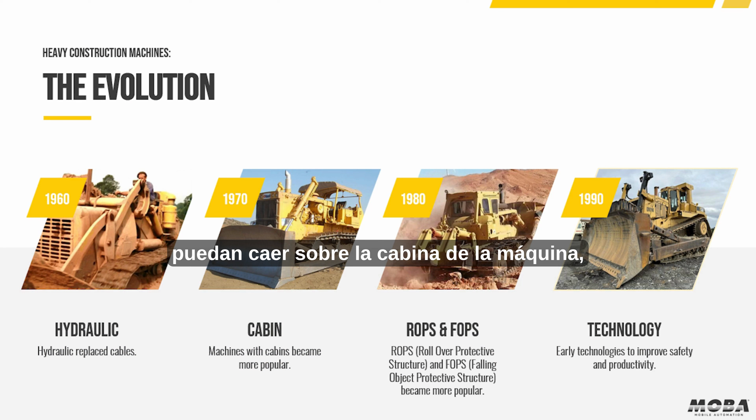In 1980, we start seeing some devices to protect the operator, ROPs and FOPs. ROPs is a rolling-over protection, so if the machine rolls over, the cabin will not be destroyed. The FOPs is protection from falling objects over the cabin, in order to protect the life of the operator.

In the 90s, we see some initial technologies to improve productivity and safety. Then in 2000, we start seeing machine control systems all over the world, to improve quality, productivity, and also safety — nobody was needed in the surroundings of the machine.

In 2010, we start seeing autonomous projects — a lot of technology removing the operator from the cabin. And then in 2020, we start seeing the junction, the mix between autonomous and remote operation. You'll understand the difference between those two technologies in a while.

So what is the backdrop of all this evolution? What is behind it? Initially, it was safety and health — more safety. Nobody was really, in the beginning, worried about the dust the operator was breathing and the conditions, the vibration he was exposed to; it was mostly about safety. But occupational health was also one main concern over the years, because a lot of workers in the mining industry started getting sick and having diseases from the work.

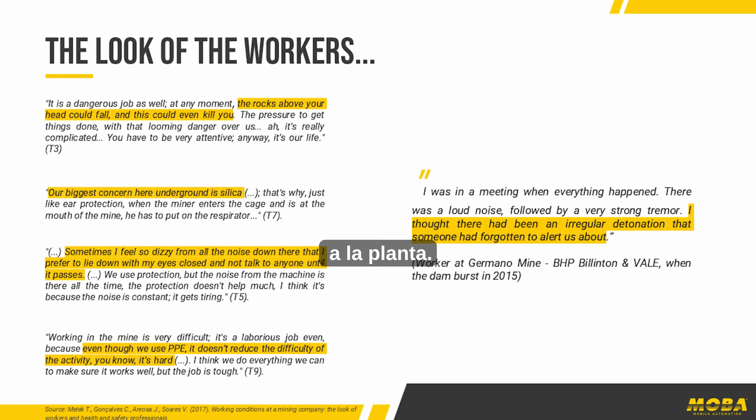So how do they feel? In yellow are the most important ones. The rocks above your head could fall, and this could even kill you.

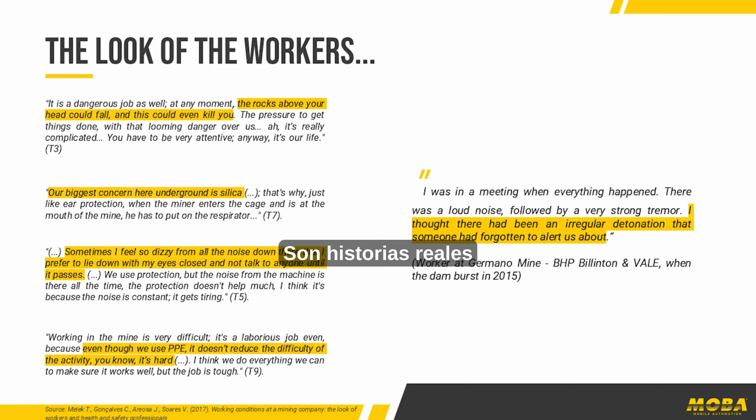These are real stories from a research study. So here is the source if you want to take a look.

Our biggest concern here underground is silica. Silica causes cancer, lung cancer.

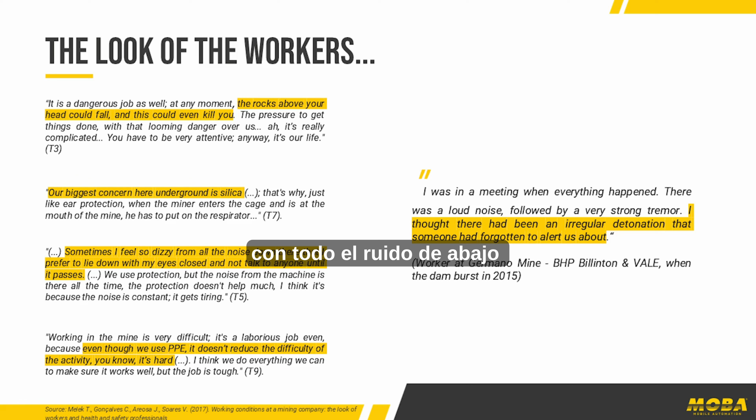Sometimes I feel so dizzy from all the noise down there that I prefer to lie down with my eyes closed and not talk to anyone until it passes. Even though we use PPE, the protection equipment, it doesn't reduce the difficulty of the activity.

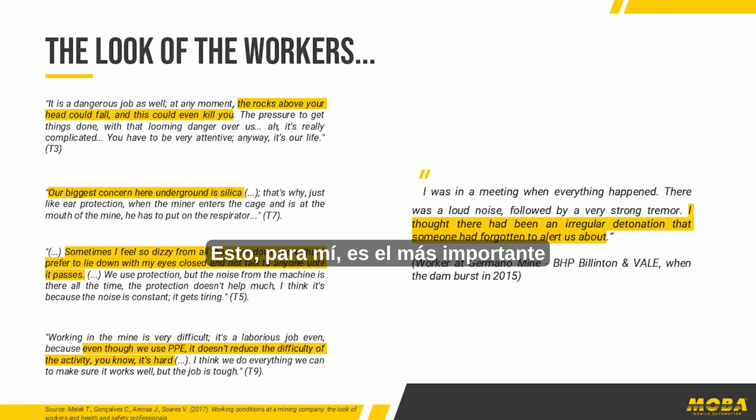You know, it's hard. This is from real operators in the mining industry. And this one, for me, is the most important because it's from my own husband.

I thought there had been an irregular detonation, that someone had forgotten to alert us. He was in the mine when the dam collapsed.

So again, maybe, or definitely, we should use more and more technology to take people out from riskier areas.

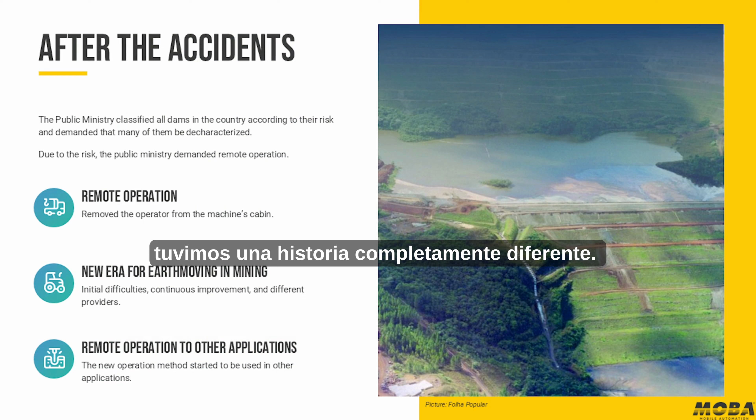So after the accidents, we had a completely different story. The public ministry classified all dams in the country according to their risk and demanded that many of them were decharacterized - that's the term. So they had to remove all the material inside the dam and give it another destination.

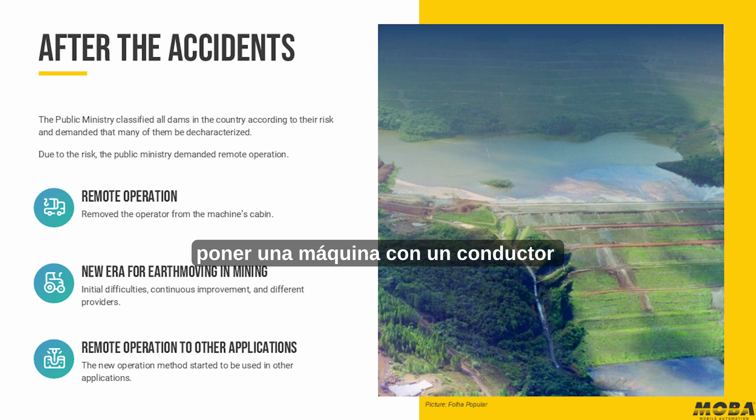So we started seeing more and more remote operation, because the public ministry said: okay, you cannot put a machine with a driver inside in this riskier area. We are talking about safety. So remote operation became mandatory.

So there was a new era for earth moving in mining in Brazil. Of course, it was a challenging time for all the companies, and they had to adapt. They had, of course, initial difficulties.

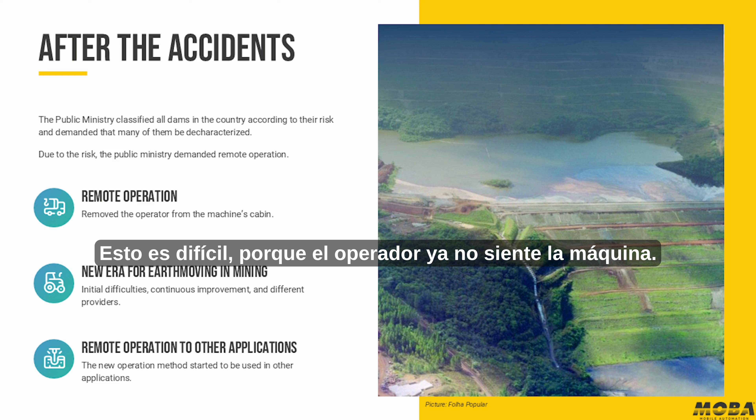When you take the operator out from the cabin, the machine's cabin, this is difficult. The operator doesn't feel the machine anymore. The operator doesn't feel, for example, that he's going into a high slope that could cause some problems, that could even damage the machine. But I think all these challenges are overcome now.

Remote operations started for other applications. So nowadays we see remote operations and also autonomous operations in different applications. We see some parts of the mine that are not really a risk like a dam collapsing, but they are starting to use this kind of thing there too.

So if we come back now from 2019 to 2025, what we see is a lot of remote and also autonomous operation. But what is the main difference between the two? Both are important. Both are unmanned operations, so there is no operator inside the cabin.

In autonomous operation, we have a lot of technology - a lot of sensors, cameras, LiDAR, everything you can imagine, artificial intelligence to make the decisions. So the machine, the technology, makes the decision. The machines are intelligent, but different from what a lot of people think, the autonomous operation does have an operator.

In this kind of operation, you don't have an operator per machine, but you have an operator in a control room, and this operator can assist more than one machine. So he's there just to do some intervention if it is necessary, and mostly to monitor the machine.

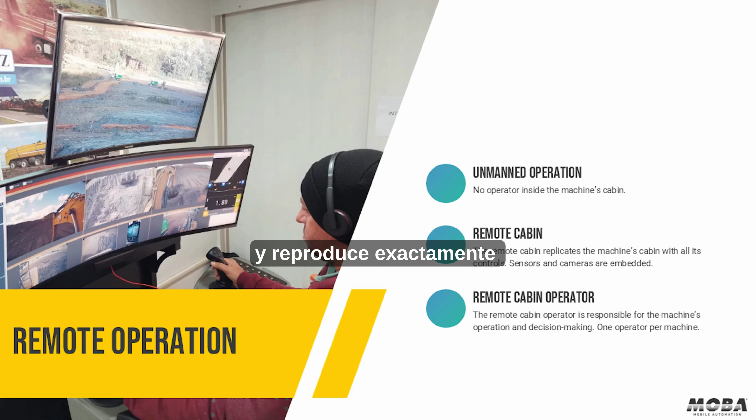And what about remote operation? It's also an unmanned operation - there is no operator inside the cabin, but there is a cabin. The cabin is in a safer place, and it reproduces exactly what is inside the machine. And here we have one operator per machine. So it is just like being inside the machine, but you don't feel the machine - the operator doesn't feel the machine like if he was inside it.

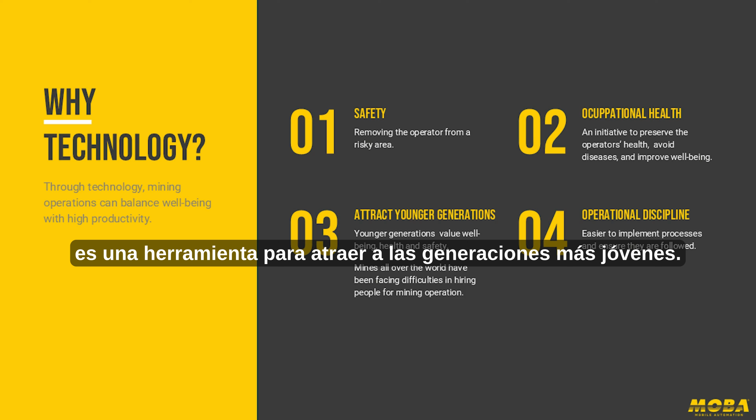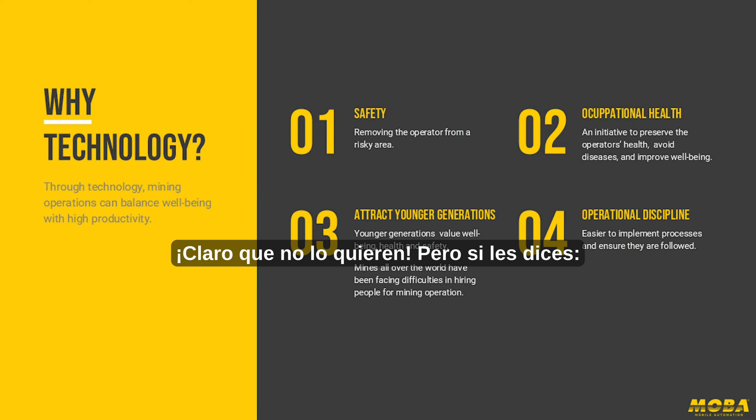I already talked about how safety and occupational health was one of the main targets initially, but nowadays this is also a tool to attract younger generations. The younger generation is the generation of influencers and social media. Do you think they want to go to a mine to work inside a machine all day breathing dust? Of course not. But if you say you operate a machine from a far distance with a lot of technology, artificial intelligence, this is how mining companies attract younger generations, because the older operators are retiring, and who will assume this? This is a business that cannot stop.

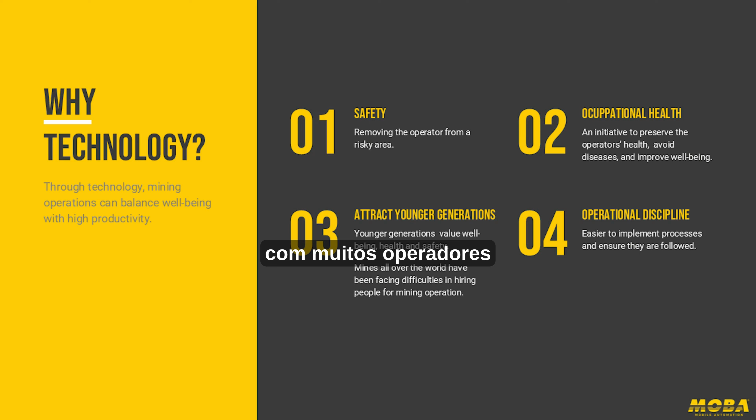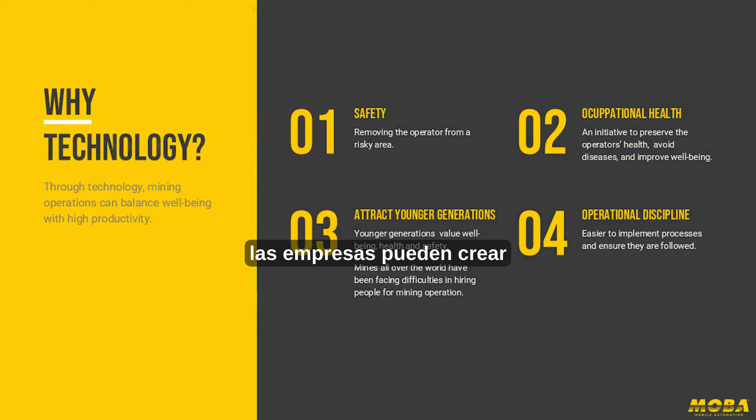Another point is operational discipline. Imagine a mine with operators who have 20, 30 years of experience. They learned how to do the job by doing it, so sometimes they have bad habits that impact the maintenance and production of the machine. When we talk about autonomous and remote operation, companies can create an operation standard. This kind of operator is much more technical than the conventional operator—he must pay attention to sensors, parameters, cameras, while the conventional operator just relies on ability built over the years. So we're talking about two different types of operator.

Sometimes when I tell this, people say no, you're wrong, because the operator doesn't feel the machine, so he makes a lot of mistakes. It could be, but let's think about time.

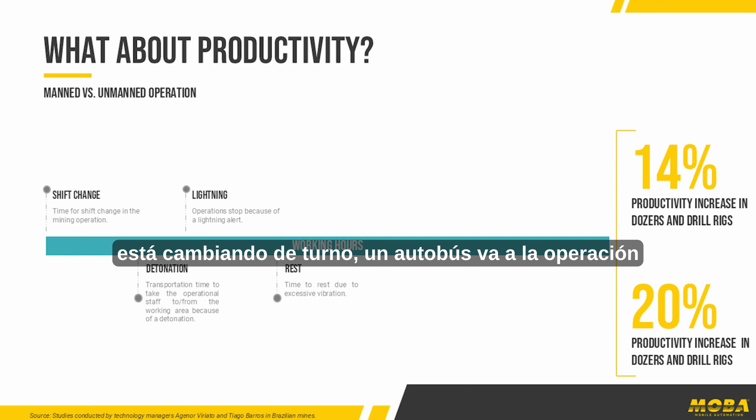In a conventional way, there is the shift change. Every day when the mine changes shifts, a bus goes to the operation, gets all the operators, takes them to the bus station inside the mine, and then the other operators come. Imagine this time, at least 40 minutes to be conservative. Then there's detonation—every time there is a detonation in a mine, if anyone here worked in a mine you know this is very common, every day or every week depending on the mine and the type of ore. So again the bus goes there, picks everybody from the operational area, takes them to a safer place, they wait for the detonation, and then the operators come back.

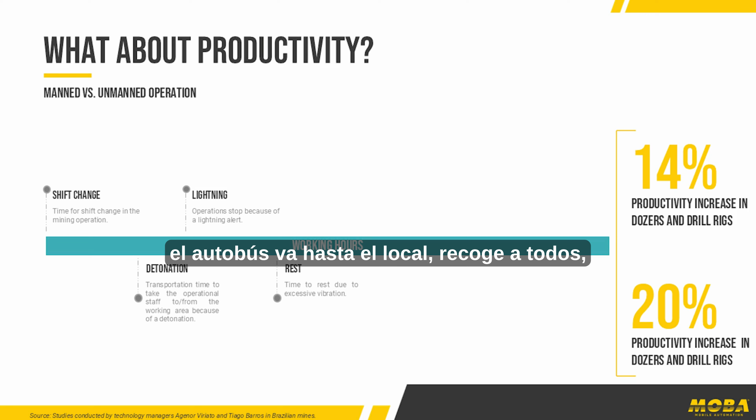Lightning—in Brazil we have a lot of lightning problems. If there is a lightning alert, again the bus goes there, gets everybody, takes them to a safer place, and then they come back. And rest: like a dozer operator—I like dozers—or a drill rig operator, is normally under a lot of vibration, so from time to time they have to rest.

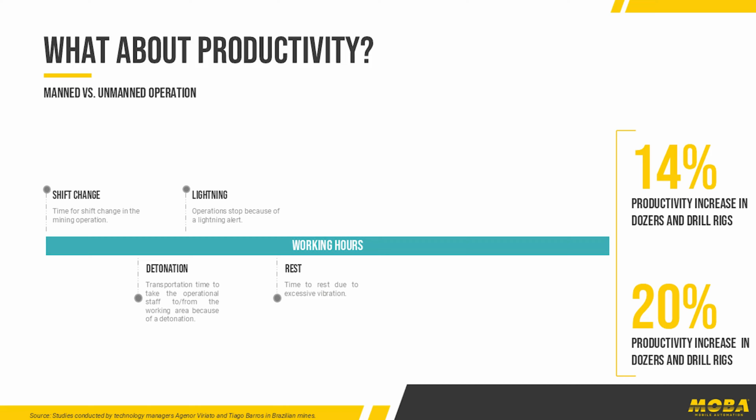So in blue I have the working hours, and in gray are the times necessary to change. When we talk about autonomous or remote operation, this gray time becomes working hours, because you don't have to do this anymore. It doesn't matter if it's raining, if there's a detonation, or if the shift change is faster—you can arrange logistics and place the bus station close to the operation, the remote operation center.

These numbers are from studies by colleagues of mine, consultants from the mining industry. Here are the names: between 14% and 20% increase in productivity for dozers and drill rigs. This is a lot. So we're not just talking about safety and occupational health, but about productivity and quality as well.

We have other benefits when we talk about unmanned operation, considering both types. Fuel consumption: 10% reduction due to operational discipline and standardization. This is something nobody could ever achieve with conventional operation, because it's very hard to convince people to work the right way—you should not move the dozer this way, you should not move the blade this way—and some people say, I do whatever I want, I'm an expert, I've done this for 30 years.

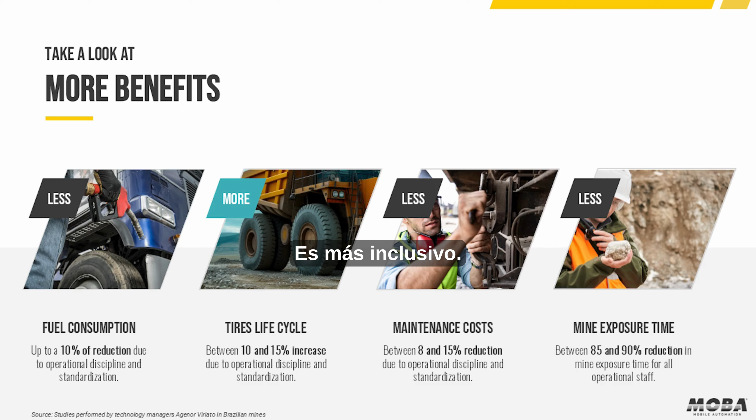But I think the best thing to see here in this autonomous or remote operation is one very special point. It is more inclusive. So here, a lot of people, everybody can be a machine operator.

Take a look at this guy. This is Thiago de Souza. He works for a Brazilian mine. He's 43 years old. He lost his leg in an accident. He would never be a conventional machine operator, but he is an operator of an autonomous drill rig. And we interviewed him, and he told us about the 3 main difficulties for conventional operation for him.

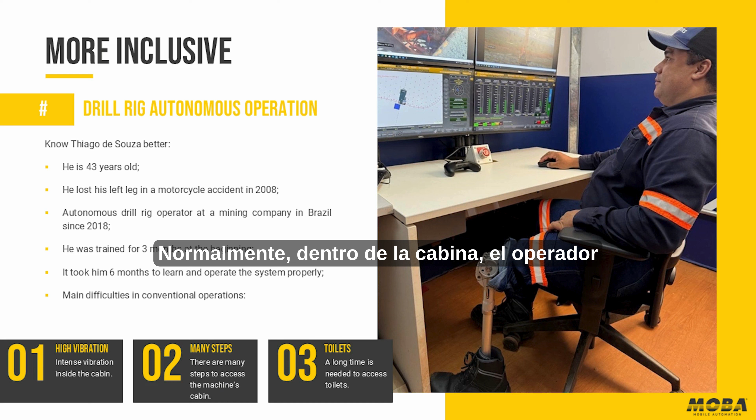So first, high vibration. Normally inside the cabin, the operator is exposed to high vibration, and this really is tiring. By the end of the day, you are exhausted.

Second, many steps, so the machine cabin is too high. He has to really go up, and there are many steps, and because of his condition, he cannot go.

And toilets. We are all humans, we need toilet, right? This is a basic thing. But for this kind of operation, and actually for road constructions as well - I've been working in a job site for some years, and toilet was the biggest problem. There are no toilets, and here we are talking about risky areas. It is impossible to put a chemical toilet depending on the case. So a car has to pick up the guy, take him to the toilet, and then he comes back. But if he cannot wait, this is a problem, right?

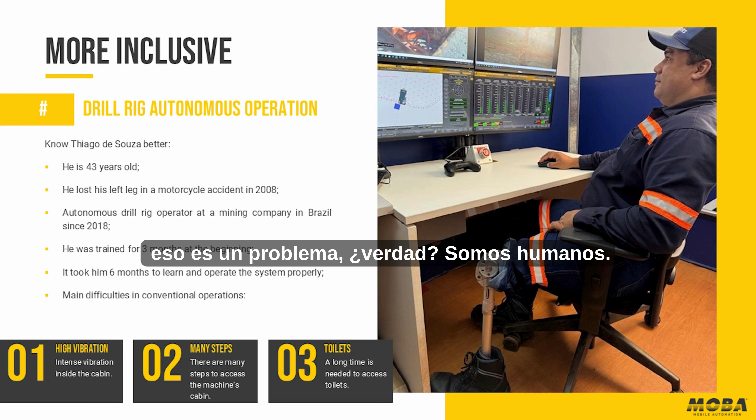So we are humans. So when we are talking about a remote or even autonomous operation, he doesn't have this kind of problem anymore.

And these are his words: autonomous technology doesn't allow you to make mistakes. Now, even individuals in wheelchairs can operate heavy machinery. So mining is for everyone.

Yeah, so this is the greatest thing from the technology. We are not just increasing safety, increasing health and conditions, but we are more inclusive. Yeah?

So, but what is the biggest difference between remote and autonomous technologies? This is an ecosystem. Probably you have heard about many machine manufacturers that have their own systems. I have an autonomous technology, or I have a remote cabin, but what is important to say is this is an ecosystem. So there are many different technology providers. You have the provider offering the camera, another offering sensors, hydraulic things. So it's like a machine - there are many components. It's an ecosystem.

The difference is, in remote operation, the human is making the decisions. He is operating the machine from a far distance. And in the case of autonomous operation, the artificial intelligence is commanding. So the operator is there just in case something goes wrong, but the technology is commanding the machine. This is the biggest difference.

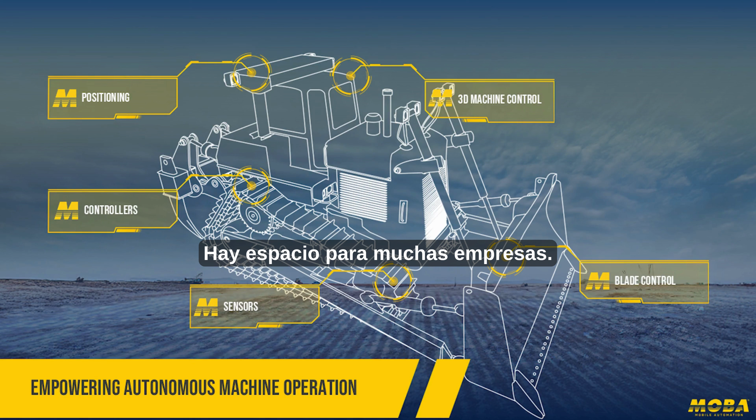So as I said, it is an ecosystem. Different types of technologies are needed there. There is space for many companies. This is something that we are really evolving together. There is not just one unique provider. We have different types, and together we are shaping the future of the mining industry.